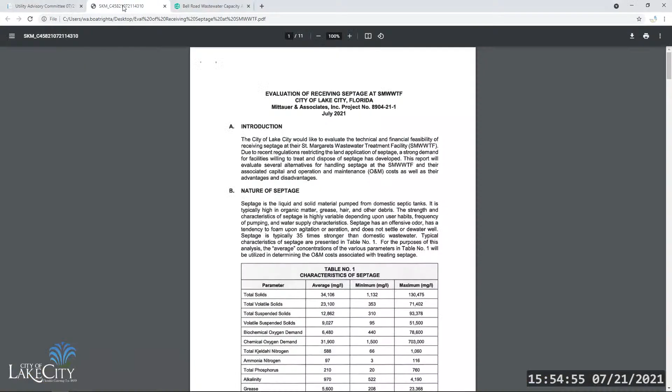One moment, please. So the feedback we received is that we had never presented the findings of the study to the full committee, and the public felt they didn't have enough information. There might have been some misunderstandings.

And so my goal with the presentation I'm about to give is to go through what the water main routing study entailed, the various alternatives to achieve the goal of that study, and then what our recommended route was, so that we can hopefully receive guidance to move forward in one way or another.

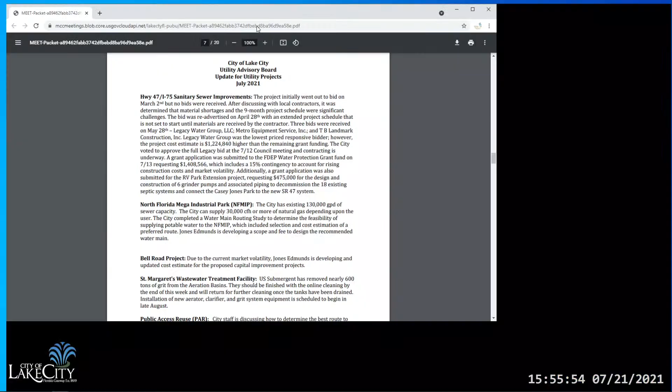Okay, so the water main route study, if you'll go ahead and scroll down to the next slide, the objective of the study, based on discussions with the County Economic Development Group and the folks who are very familiar with the projected development at the North Florida Mega Industrial Park, we decided a conservative estimate of the water demand is 4 million gallons per day.

And so the goal of the project was to evaluate route alternatives for water piping, which we determined would be best served through a 24-inch diameter water main, and to develop a hydraulic model to analyze 2 of these selected alternatives that we find, and then to develop cost estimates for the recommended routes.

The map you're looking at here is the build-out rendering map that is on the website for the North Florida Mega Industrial Park that was developed by Weyerhaeuser and their engineering firm. Go ahead and scroll down to the next slide.

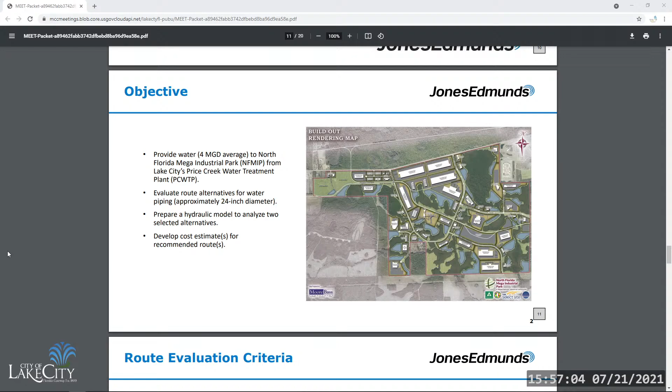We used a significant number of criteria to evaluate and identify route alternatives based on our discussions again with city and county staff, and based on good engineering know-how, and came up with this list here. It's not exhaustive, but these are the highlights.

We of course looked at land boundaries of who owns which property, the wetland locations, as Dr. Barrett mentioned. There are wetlands out in this area, pretty significant wetlands. We also looked at existing infrastructure, how to access not only that infrastructure, but also the industrial park and the surrounding properties.

We looked at the proposed layout, which you can kind of see here superimposed on the map of the industrial park, typical topography, soil type, the length of the pipe, the constraints with constructing that pipe, and our specific stated goal was to initially get water to the north side of the mega industrial park, because that is where it is anticipated that development will occur first.

As we've discussed, the residential developments that are likely coming in with the zoning changes, and any proposed businesses would likely come in off of US 90 first. And so the highest goal was to get water to the north side of the industrial park first.

So I'm going to go through the 6 alternatives that we developed first to kind of show you the different routes we evaluated to get there, and then what our recommendations were.

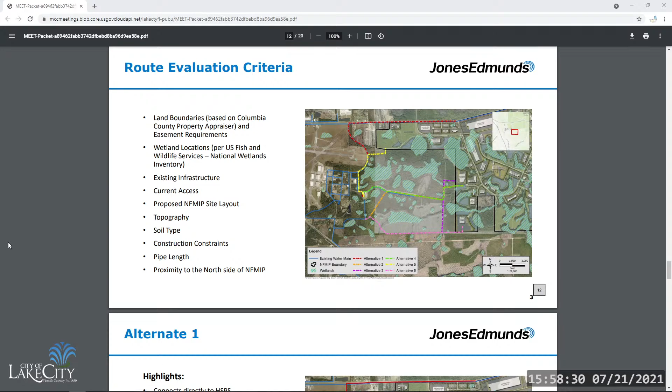So go ahead and scroll down to alternate 1. It's a little bit hard to see here. Thank you, you can kind of see it in red. So alternate 1 comes directly from the high service pump station at the Price Creek Water Treatment Plant, goes up north along Timberwolf to US 90, and then goes all the way over to Tyre Road.

The challenges to this route are the potential conflicts within the site of the treatment plant. There's a lot of piping there already, as well as a pretty congested right-of-way on US 90 and Timberwolf with existing utilities.

Just a little bit of other information, typical soil fine sand out there may require directional drilling. That's kind of in response to one of the items Dr. Barrett mentioned in his public comment, the concern over the wetlands. I'd like to point out that any wetlands encountered during these routes, we would drill under them. There's a specific permitting process through the Water Management District for drilling under wetlands, which minimizes the impact to those environmental pieces. This is a relatively long route, almost 16,000 linear feet, but the benefit is the piping is exclusively within the right-of-way of either the city, the county, or DOT.

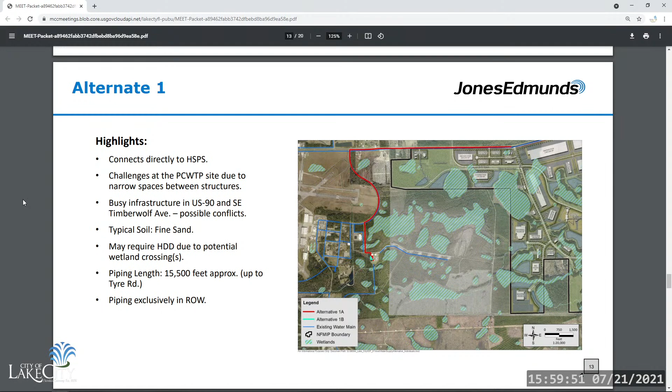Go ahead and scroll down to the second alternative. The color doesn't come across super well on the big screen, I apologize, but it's kind of like a mustardy yellow, a whole grain mustard. This one comes off of an existing 30-inch pipe that's actually south of the Price Creek Water Treatment Plant, and there's already a significant amount of supply coming that way.

It would then go up along a timber road parallel to the well field of the city, and then enter the mega industrial park roughly in the middle through one of their proposed parking lots. This one is not exclusively in right of way - it does include going along dirt roads within water district and Weyerhaeuser property. However, it does minimize the wetlands crossed through construction, so you could do it through open cut trenches, which typically is a slightly less expensive construction method as opposed to drilling under the wet areas. This one's a little bit shorter, just shy of 10,000 linear feet.

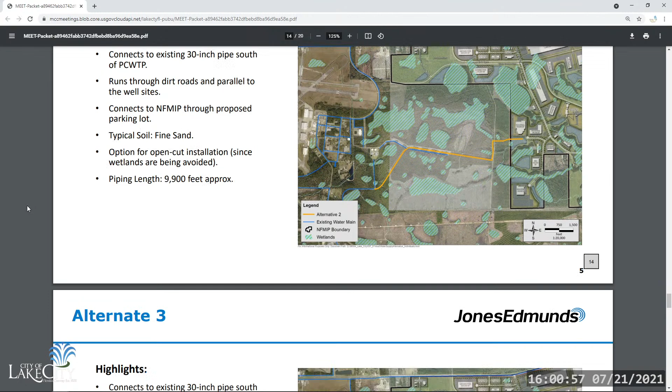Go ahead and scroll down to alternate 3. This one also stays to the south and comes off of that 30-inch pipe. Instead of coming up and paralleling the well field, this follows a timber road at the south end of the Water Management District property. It's not really the south end of their property - they own a lot of property that continues much further south, but this parcel is what I'm referencing. Then again we come up through, it references Road 363. I don't think anyone called it that, but it's one of the timber roads that goes through the district property.

This also would connect to the mega industrial park through that proposed parking area right in the middle. Coming in the middle, the benefit is you have easy access from both the north and the south with just a little bit of an extension of infrastructure, as opposed to coming in on one end or the other. This one has the most variable topography - we see a relief change of about 14 feet as we go along, which adds construction costs. The good thing with a water main is you don't have to keep a certain slope the whole time since it's a pressurized pipe, but it still does either add to your length of pipe by going up and down, or increase your construction cost by having to dig deeper to have a straight pipe.

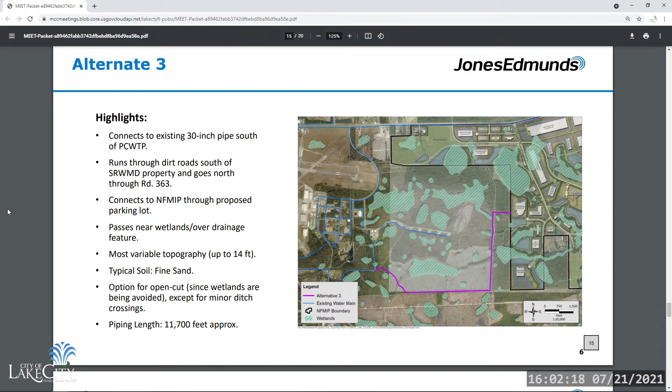Again, this one does have the option to open cut, which helps save a little money because we're avoiding the wetlands. It's kind of a medium length pipe compared to the other alternatives at just shy of 12,000 linear feet. So we're halfway - that's the first 3 alternatives. We have 3 more that we looked at.

Alternate 4, instead of coming off of that 30-inch pipe like the last two we looked at, this one comes right off of the high service pump station at the plant, parallels the well fields, and again splits the difference, coming in the middle of the industrial park. This one's relatively short, a little bit shorter than the last one at 9,800 linear feet, and again avoids wetlands, staying on the already existing timber roads. Not right of way though - we are cutting through Water Management District property.

And again, there's the potential for some conflicts at the plant site because of all the piping that already exists out there. So that's a little bit of a challenge.

This one's relatively straightforward, and we did like this alternative a lot. I do want to say it was one of our top 3. But again, I'd like to restate that one of the primary goals was to get water to the north end of the park first, and by coming in the middle here, you still have to add more piping to get it to the north end.

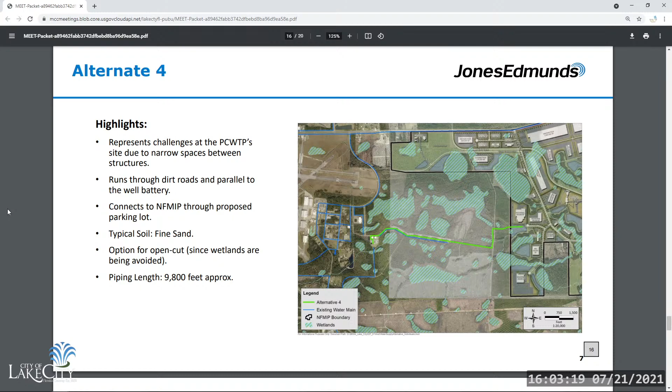Go ahead to alternative 5. This is actually 5A and 5B that you can see in yellow. This one comes right off of the high service pump station, goes north along Timberwolf, and then cuts across one of the timber roads on the Water Management District property to the edge of the mega industrial park.

Again, one of our stated goals for this report was to identify getting water from the plant to the park, not necessarily piping it through the park. That's why we broke this into 5A and 5B. 5A gets us to the edge of the park, the boundary, and it's the shortest route if you do it that way. It's only 5,800 linear feet, so it's relatively short, which leads to inexpensive.

It does cross at least one wetland that we know of, but again, we would propose drilling underneath that wetland. And if we stop at the park boundary, we're mostly in the right of way with just a little bit of coordination with the Water Management District.

Now, we proposed 5B as well because not only did we want to get water to the residential area, which is kind of the northwest corner of that peninsula of property, but we also know there are businesses that are looking to come in off of US 90. So we wanted to be able to provide water to those businesses, and by coming up through the proposed roadway within the industrial park and then connecting with the existing water main on US 90, you create a looped system.

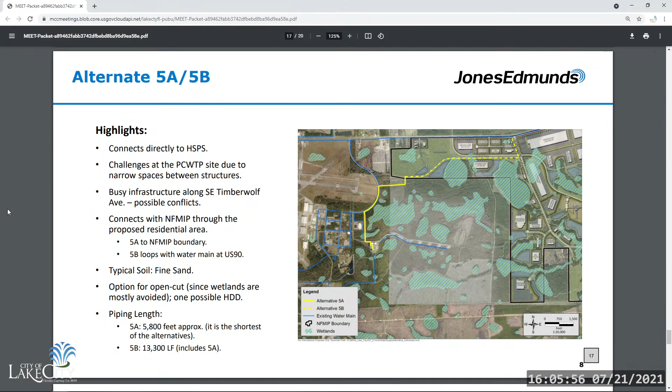And then if you scroll down, our last alternative we looked at was 6. This one is also kind of hard to see—it's pink down there at the bottom. This comes off of the 30-inch pipe.

Thank you for printing that out. It follows Timber Road down the south end of that parcel and then connects to the North Florida Mega Industrial Park at the south end. It's a relatively short pipeline. We're avoiding wetlands for the most part, with a couple of minor ditch crossings. It does have a little bit of variable topography, but it's another relatively straightforward construction job.

The only problem is it comes in at the south end, and our goal was to get water to the north end. We just wanted to show that we did evaluate bringing water into the park in multiple places, because it gives you more flexibility and more options to look at.

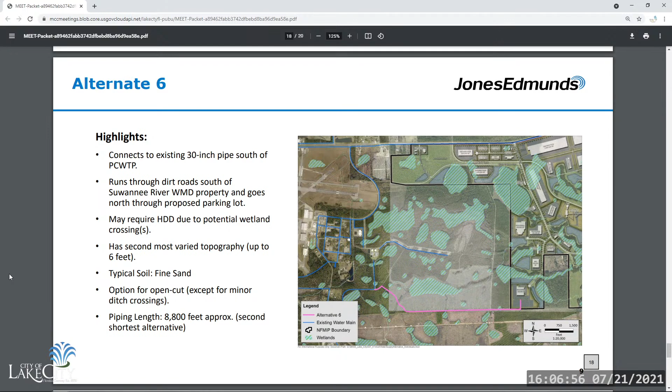So that was all 6 of the alternatives we identified as ways to get water from the plant to the park. If you scroll down to the next slide, we presented those alternatives to city staff. We had a workshop where we went through all of the pros and cons, potential challenges. We created a scoring system matrix to look at all of those items that went into the evaluation, and we recommended 2 of these alternatives. So we modeled these 2 as our selected alternatives.

One alternative again goes up north along Timberwolf, along US 90, to that first west entrance to the North Florida Mega Industrial Park, which allows us to serve the residential area as well as the businesses we believe will come in first. Whereas 5A and 5B is a little bit shorter. It still serves the same area, but we avoid the congested right-of-way along US 90, where there's already about 4 different utilities running, so we likely would not be able to construct in the DOT right-of-way. We would have to get a new easement south of that from Weyerhaeuser.

So in the end, we modeled both alternatives. They both had very similar results with regard to their impact on the city system, so the difference is relatively de minimis. And we ended up recommending alternative

5A/B. We believe 5A should be the first phase of this, getting water to the park while development in the park is still being worked out. Then once the development is a little more locked in, and we know where the road and businesses are going to go, we can coordinate design and construction to do phase 2, which would be 5B.

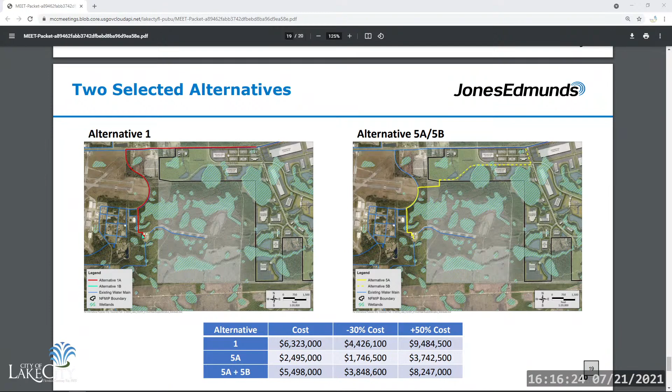So the 12-inch right now — I think is what you said, 12-inch exists behind the library as we speak, correct? And just like it's showing here. The blue piping in that picture is the existing water line. It goes up, it actually borders that library on two sides — the east side and the north side. What size is it? It loops around the end of the airport, it's 12-inch. 12-inch all the way? Got you.

Now with that, Jamie, you mentioned a secondary watershed study. That would be separate from this, correct? But if they're having a flooding issue, that might be something there's grants available for. There's a lot of watershed studies, because maybe there's another way to mitigate that, since it wouldn't be caused by this activity.

There are grants out there with the American Rescue Plan Act funding coming our way, specifically looking for projects that address resiliency and equity. With Columbia County being a rural area of opportunity and a low-income, fiscally constrained community, we would absolutely qualify for equity-based grants. And flooding or flooding protection projects also qualify under resiliency.

As an example, when the notice of funding opportunity is released, which it has not been yet, they'll offer planning grants for a study, and construction grants. So the county and/or the city and/or the college, since it's a public college, could apply for these grants, and then hire an engineering firm, possibly me, to do that study.

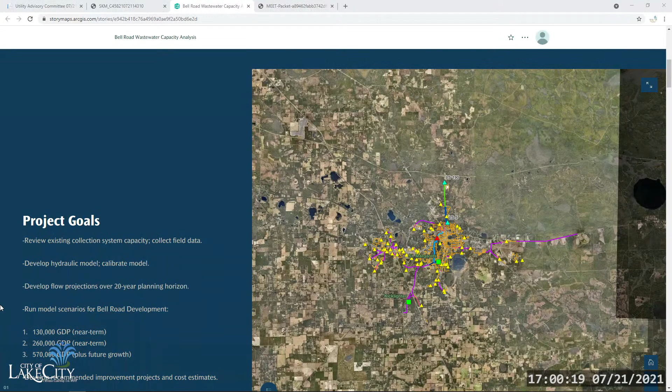If you could scroll down. I guess the font's a little small, I apologize. The goals of the Bell Road wastewater capacity analysis project — you can zoom in on that map to show everyone, just use the scroll wheel. Is it scrolling the whole window? You can use the plus and minus signs in the bottom right corner, and that should zoom the actual map itself.

The colors don't show up great on the projector, but this is an example of the spatial data for the city's wastewater utility system. Bell Road's at the north end, and the St. Margaret's plant is in the middle there. The goal was to review the existing collection system capacity from the Huddle House down to the St. Margaret's wastewater treatment facility, develop and calibrate a hydraulic model, and then develop flow projections over the 20-year planning horizon and put those into the model as scenarios.

As I said before, this project had a discrete goal: to look at a specific business coming in that had known flows that might be going onto Bell Road, and that's what the scenarios reflect. Scenario 1 was their one line of product, 130,000 gallons a day of wastewater, very near term, like in the first year. The second scenario was 2 lines, so 260,000 gallons a day, also in the very near term.

We did a third scenario that looked at future growth in the city, plus the full build out of this mystery business that was going to come in with their product lines. That was 570,000 gallons per day. Based on those scenarios in the model, we developed recommended improvement projects and cost estimates.

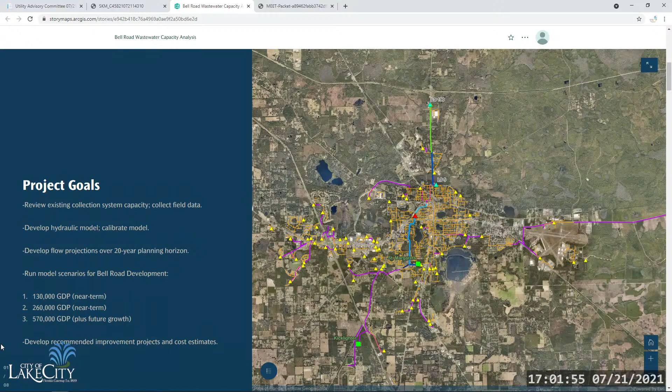You can go ahead and scroll down and we'll go through the 6 projects we identified. The first one was improvements at lift station 5, which was really simple — just upsize the pumps to address the additional flow, helping prevent high water level alarms and prevent the lag pump, basically the backup pump in the lift station, from needing to turn on.

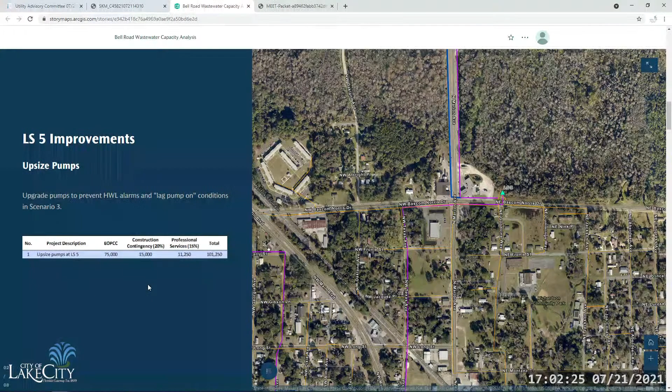I apologize for how small the font is on the left. I think you can scroll in with the scroll wheel this time and make it a little bigger — no? I don't know, apologize. But what you just did work, you can do that little zoom in.

Basically this table represents our engineer's opinion of probable construction cost, with a 20% construction contingency to keep in mind the current market volatility, and 15% for professional services, because this was a planning level effort supposed to look out over 20 years. We're being really conservative with these numbers, and that's what the total cost is. For example, this project costs roughly $101,000.

That's just to upsize the pumps at this lift station to address the future flow.

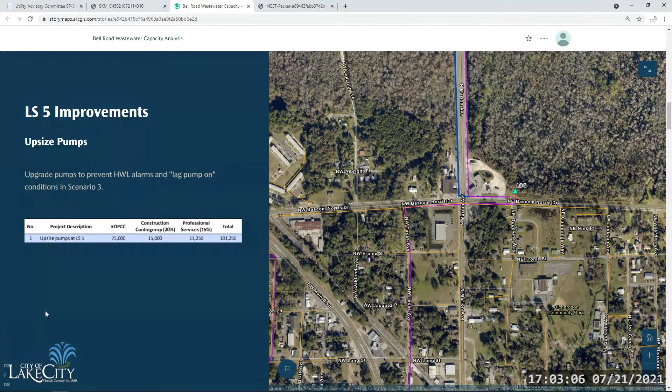You can scroll down to the next project. I can also in the future bring actual visuals of the model showing the pipes that are good versus the pipes that are bad. But this is us dipping our toe in the water here. As I present on the master plan, I'll bring model scenarios for y'all to see. So this next project would be from lift station 190 to lift station 5.

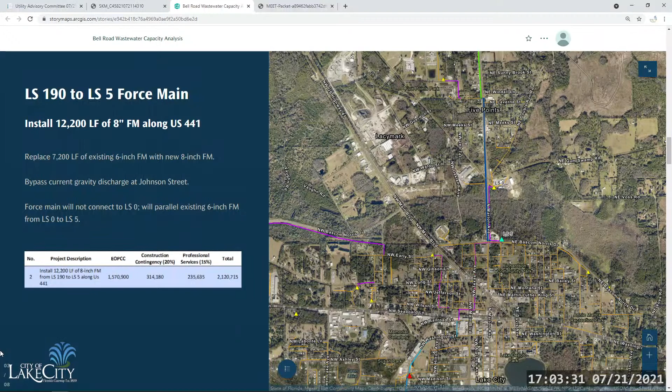It looks like our zoom got a little screwy, but you can click and drag the map down to see the full extent of that pipeline. If you grab the middle and drag down... yeah, there you go. And maybe zoom out one if you hit the minus button on the bottom right. Yeah, there we go.

I know it's a little hard to see, this is a work in progress with the projector, but lift station 190 is at the top, the green triangle. Lift station 5 is down there near the bottom. And the project would be to replace 7,200 linear feet of existing 6-inch force main.

We're upsizing it to 8-inch, that's the green section of pipe. And then we would add an additional section of 5,000 linear feet of 8-inch force main to bypass the current gravity discharge. Basically, this helps alleviate capacity concerns in the existing gravity collection system and just pump it straight down to the next lift station.

So we'd be going away from lift station 0, which you can kind of see in the yellow triangle. In this project, the engineer's opinion of probable construction costs plus contingency and professional services is $2.1 million. And again, that kind of fixes all of the pipeline constraints from Huddle House, which is lift station 190, down to the north end of downtown.

You can go ahead and scroll. How much, Jamie? That is $2.1 million. So the basic construction cost is 1.5 plus contingency and professional services. How much would that increase your sewage flow? So these recommendations are all to meet the needs of scenario 3, which is 570,000 gallons per day. And we're just addressing constraints from Huddle House down to St. Margaret's.

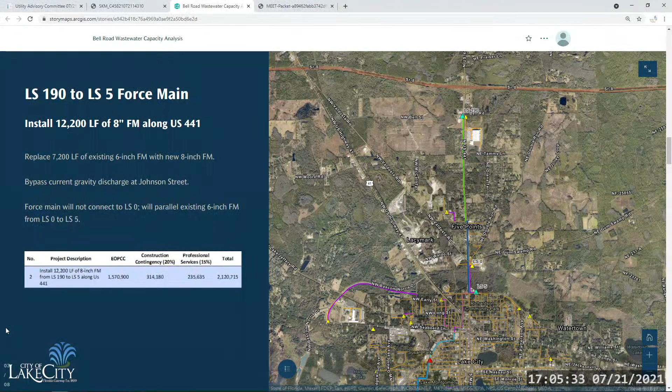But yeah, that's what these projects are. So this focuses on the north end of town, kind of going away from the gravity system that's getting full and just going from one lift station to the next. We call that repumping. Okay, so that's project 2. You can scroll down to the next one.

So this third project is the Northwest Washington Street Force Main. It basically is the section of force main from the railroad, Northwest Railroad Street, down to kind of Young's Park right there. We would put in a new 10-inch force main. Again, this is to alleviate concerns in the existing gravity collection system, which is the piping is too small to handle that flow. So we're just going to blow past it and go from one lift station to the next.

This would also be paralleling an existing clay pipe. So basically there's an old clay pipe that can't handle much more flow without breaking, but it's not useless. So instead we're just going to put a new line next to it, so the clay pipe doesn't take on any more flow and we just pump past it. That's what we're collecting. So that project is just under 3,000 linear feet of 10-inch force main, and that cost is $739,000.

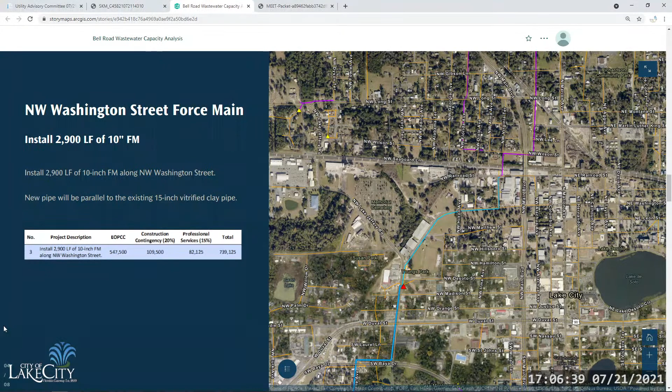So you can go ahead and scroll to the next one. So this next project is actually kind of a two-parter. We are recommending the construction of a new lift station at Young's Park, and we kind of roughly placed it at the corner of DeSoto and Lake Jeffrey. That was just conceptual, that can change. The goal is we're intercepting flow from the upstream lift station and gravity system, and then we're going to send it through a new force main straight to the plant, basically, because this section of town is older.

The pipes are typically made of clay, and so they break easily under too much pressure, if they're too full. And there are environmental concerns in this area because there are those lakes that are right there. So the idea is you put in a new lift station to intercept that flow, so instead of going all through the gravity system along the lake, you just pump it straight to the plant.

We would design it so that you can periodically flow through the gravity system to keep it flushed out and keep your solids suspended, which is important. We don't want to completely eliminate the flow. That's because this gravity pipeline goes behind houses on the lake, and it'd be really challenging to take that pipeline out and put a new one in. The topography and elevations work against us, and it would be very expensive to do that construction right next to the lake. That pipeline is like a single point of failure right now for that area, so we're creating a secondary route, but not taking it fully offline.

Just the lift station itself would be roughly $486,000. I want to say these cost estimates are all from a very recent bid we had on a Jacksonville Beach project that included all the force main components and lift station components you're seeing today. So these are really up-to-date costs based on the market we're seeing now. But you'll notice if you compare this to the report, they're about 40% higher than what we found last year. That's how crazy the market is.

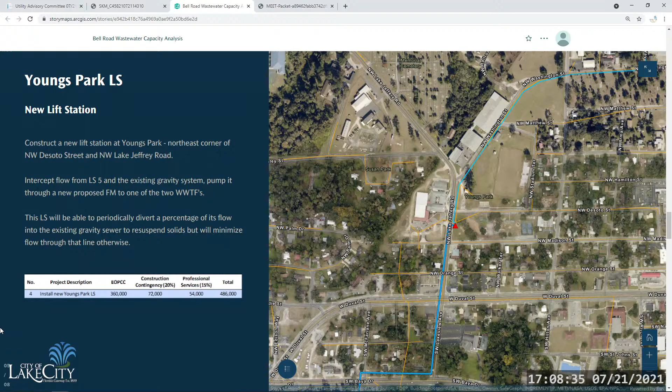So if you scroll down to the next one, this Young's Park lift station would go into this new pipeline. I'm going to walk up to the map. It's kind of hard to see, but the pipeline I keep talking about, the single point of failure, is this gravity main that comes along Lake Montgomery Ave right here, and it's behind all of these houses. So to go in and replace that pipe or do the work here would be very challenging construction-wise.

But from an environmental concern, we don't want to put any more flow in this pipe because it would break and go in the lake, and nobody wants that. So this is kind of the concerning area all along this strip along Lake Montgomery.

The plan is to put a new force main from the new Young's Park lift station down the road, straight down McFarland to the St. Margaret's plant. It's a long pipeline, almost 2 miles, just shy of 10,000 linear feet. This is the most expensive standalone project, but realistically it would be combined with the previous one we just talked about. This pipeline alone is $2.29 million, roughly.

And this, again, allows us to bypass all that older gravity system, kind of east of this proposed pipeline, and take the pressure off that part of the system and reduce environmental concerns.

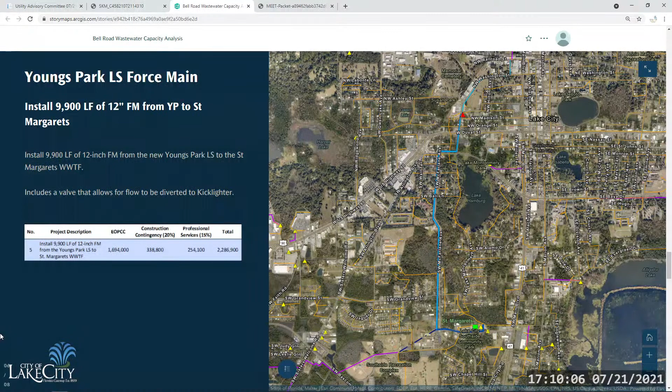If you scroll down, our last project is what we're calling an optimization project. This is one of the goals of city staff, to kind of optimize the flow between the two plants. St. Margaret's is nearing capacity. What capacity can St. Margaret's hold? It's not nearing the DEP concern limit, which is 80%, but it's a 2.95 million gallon a day capacity, and it's getting a little over 2 million.

So we're getting close. While we can send this flow to St. Margaret's and it can handle it, we don't want to hamstring ourselves from development throughout the rest of town. So this is the recommended optimization project. I know it just looks like a straight line through that property, so we can go around the ballpark, but this is just giving you the idea.

We would install a short stretch of force main and valve it so we can redirect that flow to Kicklighter, but still have the option to send it to St. Margaret's as needed based on whatever percentage of that flow it can handle. This gives staff more control over how the flow moves through the system, and the opportunity to send not all of the north side of town to Kicklighter, but whatever percentage they want, because this would be a big line taking a lot of the north side of town.

So that would be 1,600 linear feet. The real project realistically would be a little bit longer because we probably want to follow the roads. But again, it's just the idea that you could shoot it over this way to the line that goes to Kicklighter. It's a relatively inexpensive project, all things considered, just under $600,000. But with all of this together, you get to move a lot of wastewater around and give a lot more control, and it allows you to open up capacity at St.

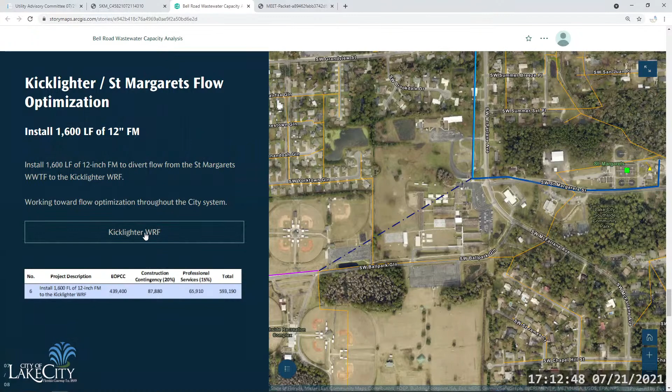And you can actually, where it says Kicklighter Water Reclamation Facility, you can click that. It's a button, and it's supposed to zoom out to show you where Kicklighter is, if it works right. It does. All right, I'm excited about this map. I got to work on it with the colors, but so you can kind of see just that little connector piece will connect us to the existing lines that go down to Kicklighter.

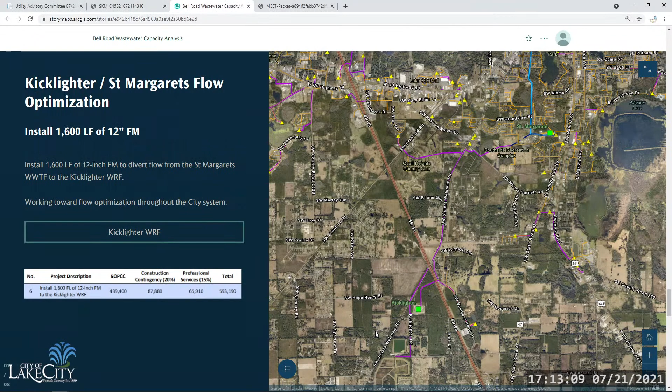So what is the total cost of all the pieces? Of all the pieces together, it's 6.3 million. And if you scroll down one more, it actually has the summary table with all the costs. And if you have any questions, we can click on these buttons to zoom to each of the individual projects. But yeah, the grand total of all 6 is

$6,327,180. And that is an updated cost estimate based on recent bids from the last 60 days. So that's as close to an updated number as we're going to get in today's market. And that's, again, to do all 6.

Now, this plan, it adds the capacity, and with what those companies want, is there more capacity to take some of those septics up there on the north side offline and put them into our system? Yes, and so what we looked at when we did this model is along this pipeline, we looked at the commercial and residential areas that feed into it currently, and we used the medium rate county growth rate to assume residential and commercial growth in the area, and it exceeded the number of vacancies for basically empty parcels.

And so we assumed full infill development along with the flows from this proposed company, and these projects address all of that flow. So it's a big company coming in, 500 and some odd thousand gallons a day from Bell Road, plus full infill development along the route of this corridor that covers all of it.

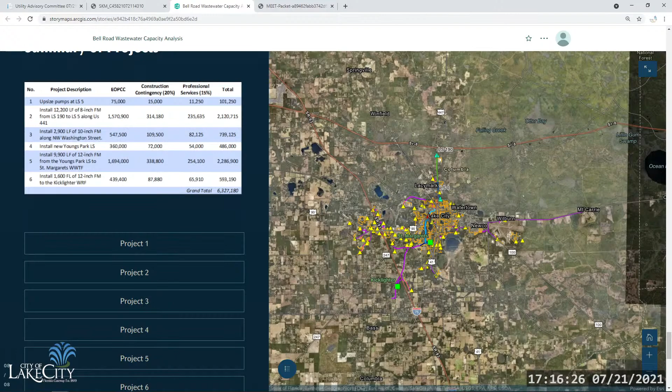In the report we did talk about what happens in this scenario, so you can parse out a prioritization from there. But this project did not include prioritization, it was just what do we need to do to meet the need. For the master plan, we will include a prioritization analysis and a recommended schedule for implementing the projects to address demand as it grows in 5, 10, and 20 years. This project just didn't have that level of detail.

So Jamie, in your opinion, relevant to Todd's Lake and the issues we've got down there, wouldn't this put us a little farther up the line as far as accessibility to possible DEP grants, EPA grants, right on down?

Yes, and all the phases are important, but if we could only get funding to do one, I would love to do the one going around the lake, because like Jamie said, that is our single point of failure. If that line goes out, you've got trouble - not only is it going to be a challenge to repair, it's going to be an environmental nightmare, and we could exceed that $6 million real quick. You'd have to bring emergency services in for something like that.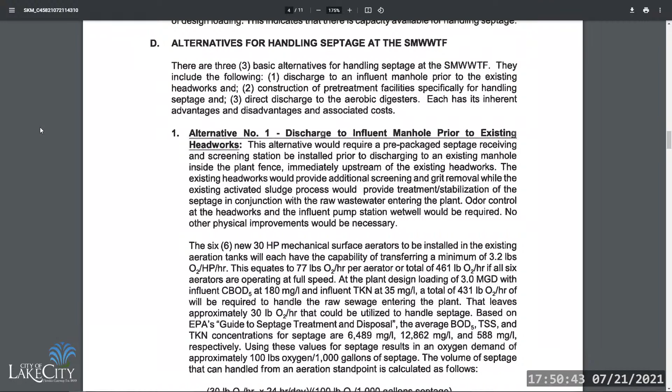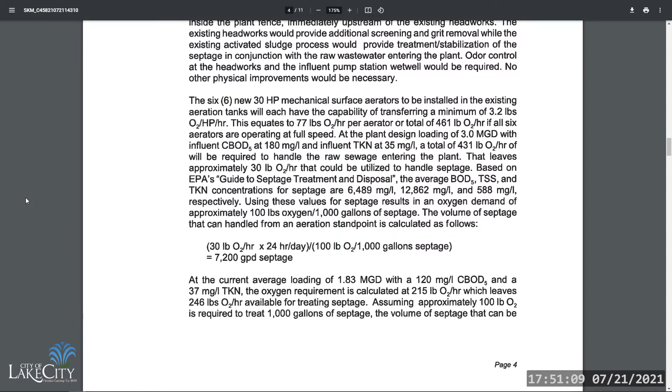And based on that, they did some calculations. At plant capacity, the plant's permitted for 3 million gallons a day, and at the current loadings on our influent, there'd be enough oxygen available in our aeration to receive 7,200 gallons per day of septic.

The 21,500 gallons per day of septic would be maxed out on our current average flow rates at the plant. If we brought the plant up to capacity on the loadings, then we could receive 7,200 gallons per day.

They recommend that if we choose this option, to start out with 8,000 gallons per day, and if we don't see any problems over a month or couple months, then increase it by 4,000 gallons per day in increments until we do start seeing issues or adverse effects, and then we'll back off to where it's an acceptable level.

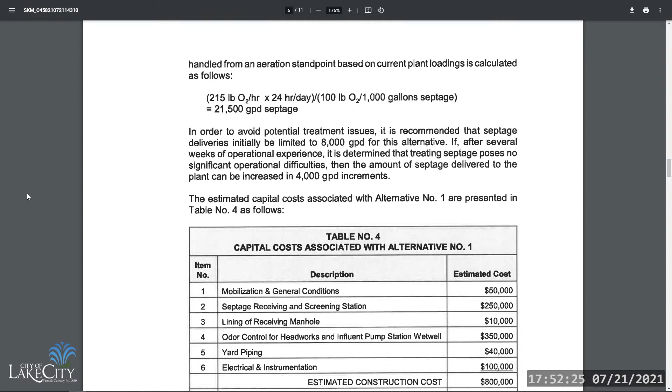But keep in mind that if we get up around that 20,000 gallon a day mark, then we're putting the plant at capacity, even though we still have flow capacity. The loading on the plant is going to be putting a strain on it.

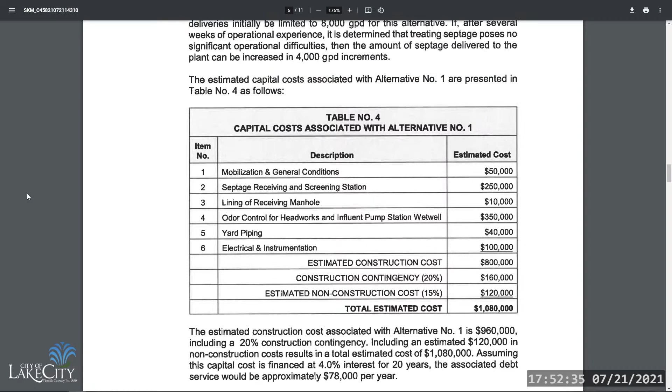Table number 4 shows the total cost of what it would take to get the plant, everything that we would need to be able to accept the septic upstream manhole. Total for that would be $1,080,000. That's an estimate; it could vary a little bit.

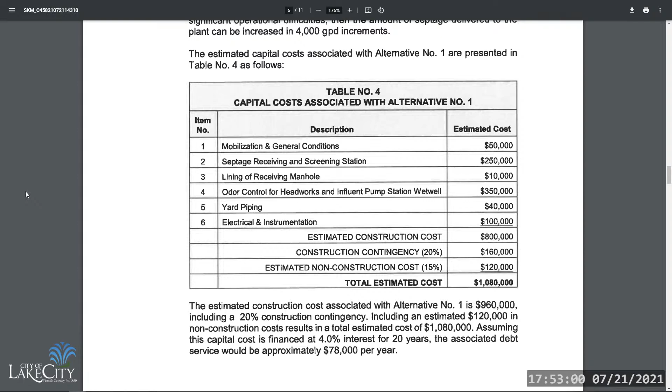The next one shows the operating and maintenance costs on that, table 5. They're $234,000 annually to operate and maintain the system. That includes the labor, the power usage that it's going to take, the additional chemicals that we're going to have to use, and the biosolids disposal. All that's going to increase with the added solids loading that the septic is going to put on the plant.

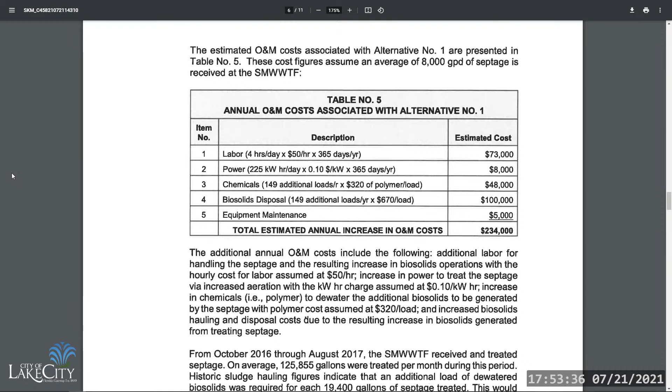Table number 6 shows the advantages and disadvantages. It can generate a revenue stream for the city, and provides a much needed service for the septic tank pump out industry. The disadvantages are that it's going to significantly increase the plant O&M costs, power usage, labor, all that. There's potential for odor generation, though we did factor in for odor control. We'll need to confirm there is a viable market from the septic haulers and that they will want to pay the rate that we're going to have to charge to break even.

It consumes the capacity of the plant, has potential for excess foaming and aeration, MLSS fluctuations, suspended solids in the plant, and does not allow for controlled introduction of septic. By that, I mean like we were accepting it before, they were dumping right into the headworks. A tanker would come in there, dump a load of septic right into the plant, and it went right into the aeration - that's what caused all those major fluctuations and issues.

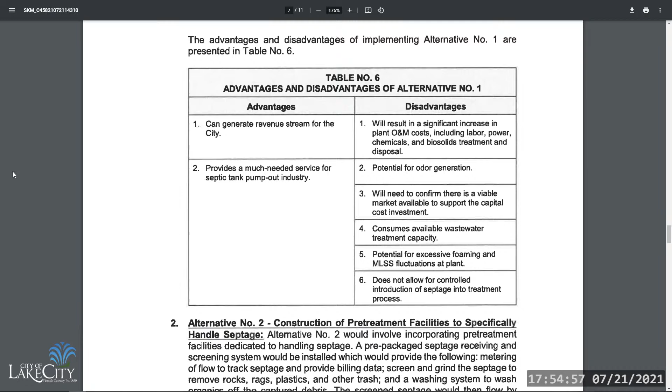Alternative number 2, which is the one I like the best, and as we'll see later the engineers recommend it as well, is construction of pre-treatment facilities to specifically handle the septic. Like I mentioned before, we have an existing tank there that we could modify. We could add in a septic receiving facility, which would further screen it and move any big debris out of there, blowers to aerate it, and then a pumping system to add it to the plant at a controlled rate.

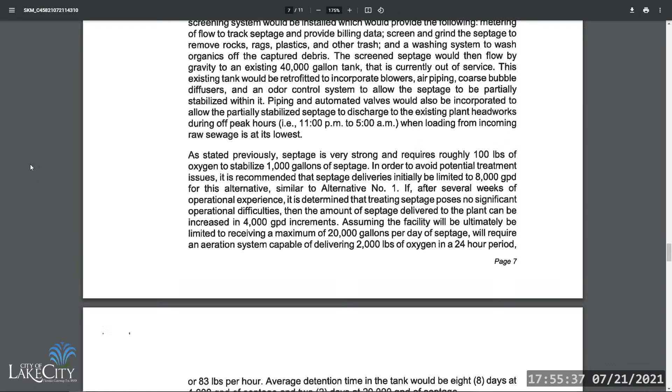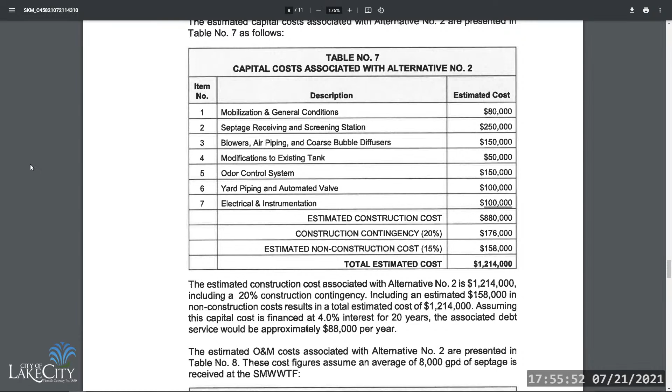Table number 7 shows the total cost for that one would be $1,214,000. So not that big of a difference for what I feel is a major advantage on treatment and saving capacity on the plant because of further aeration.

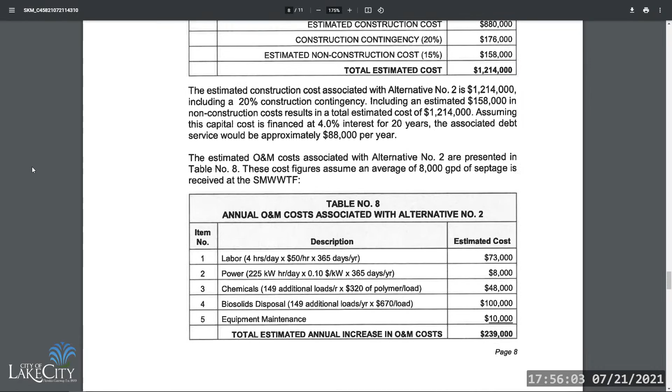Table number 8 discusses the O&M cost of that unit, which is roughly the same as the other option.

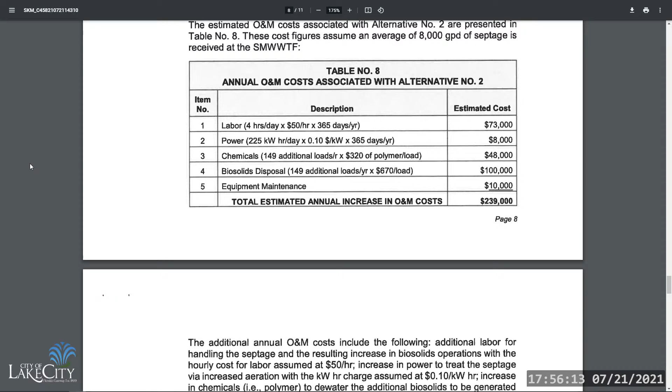So, on the first option, I kind of skipped ahead there a little bit. I think the break-even point for the city would be 11 cents per gallon. That's breaking even. On option number 2...

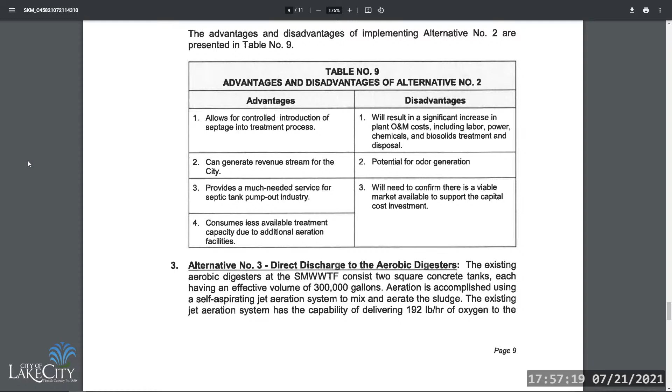Break even for the city, I believe it was 11 cents per gallon. And then they put in their alternative number 3 down there at the bottom: discharge to the aerobic digesters. I won't even go over that. Based on the treatment of the aeration in the digesters, they say...

Based on the required frequency of dewatering, only partial stabilization of the septic may occur. Prior to dewatering operations, the generation of odors would also be a major issue, and odor control facilities at the digesters would be required. For these reasons, and the fact that the existing aerobic digesters are somewhat undersized for a plant with a capacity of 3 million gallons a day, we do not recommend the introduction of septic directly into the digester. So alternative number 3 is pretty much off the table.

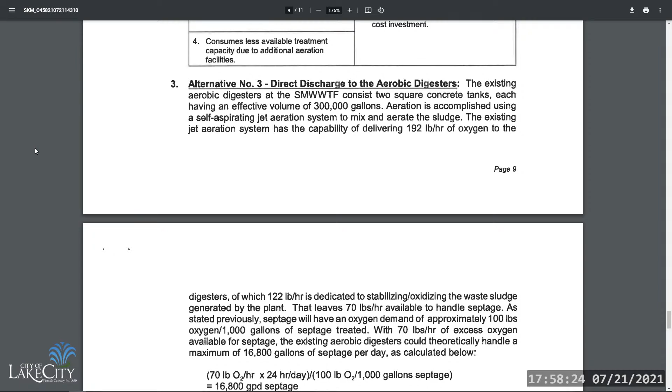Their recommendations are that—scroll down, Adam, to page 10—they realize there's a high demand for septic treatment facilities, and I think, like you said Mr. Sampson, it's only going to get worse over time. Typical charges for treating that at other facilities is 10 to 12 cents per gallon. They recommend that we start out with an initial charge of 13 cents per gallon.

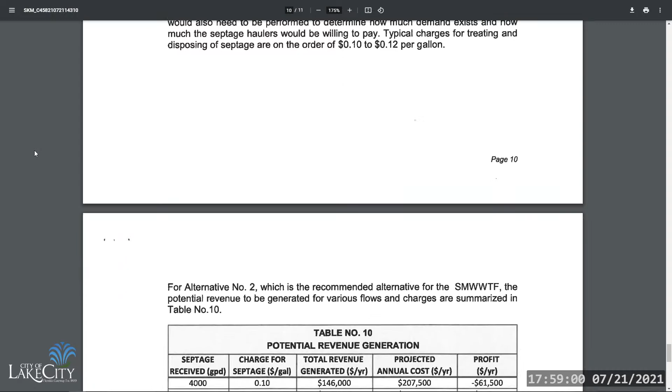That allows for roughly $50,000 annual profit for the city. Keep in mind that is at an 8,000 gallons per day average. So if we don't get 8,000 gallons a day, that profit margin is going to shrink a little bit. And also, as the flows increase at the wastewater facility, then the amount of septic that we can receive is going to go down—actually, our capacity is going up.

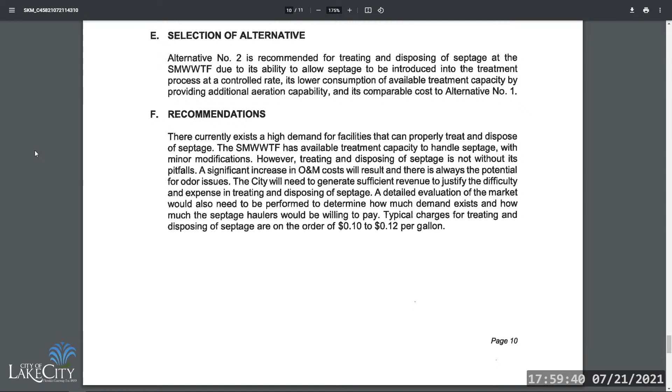The flow is floating on the actual influent flows. So there's some cost breakdowns, like I said, I'll give these to y'all, you can go over in further detail if you want. Pretty much it, that's all I've got, if you have any questions.

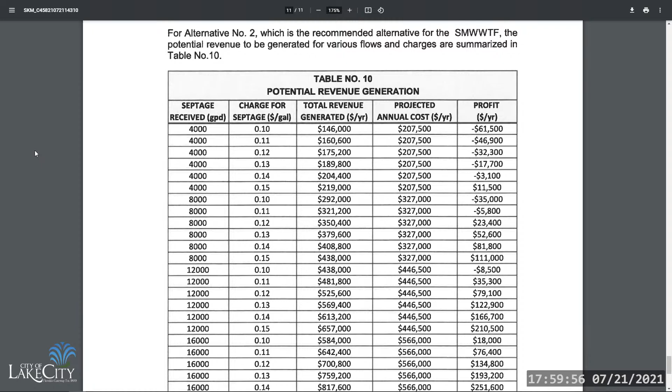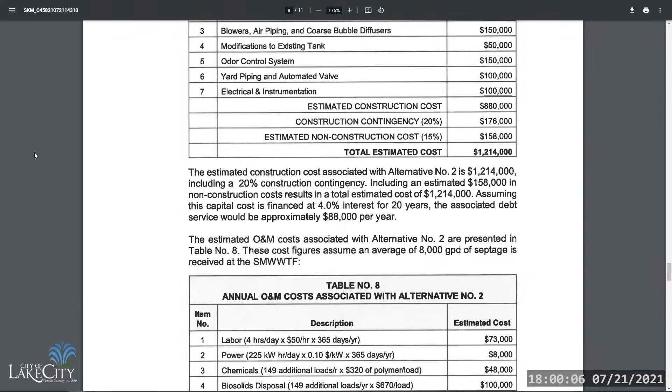I have a couple quick questions. So the 8,000 gallons a day—I couldn't quite make out, with option 2, how many gallons a day can we actually treat on the high side? Did it say 30,000? Yeah, I believe it was the same as option number 1—20,000 gallons per day is maxing out the plant. Okay, so I didn't know if that would have changed with the tank and the way it's entered.

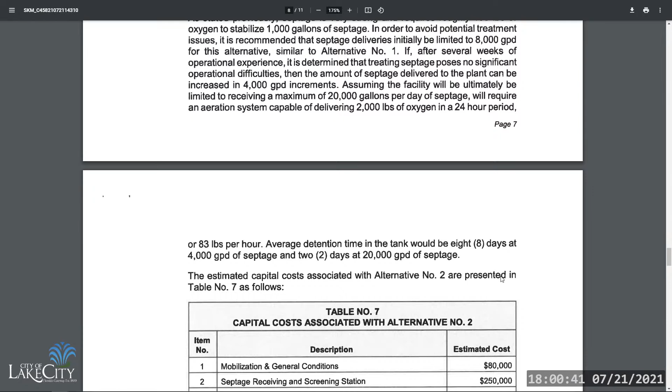No, that's why they're recommending starting out at 8,000 gallons a day, and then we can increase that until we start seeing adverse effects on the plant, and we'll probably back it down some. Or, like I said, if flows increase at the plant, we may back it off.

And so another variable we control will be the pricing per gallon. So it could be that initially we're not the cheapest, I wouldn't think. And I don't think we'd want to be the cheapest provider, but there's a lot of factors as to where you're going to dump to—what's the gas cost to take it wherever you're going, or the diesel, compared to this.

So I think the other issue is we'll tap out at 8,000 a day. I don't know what the actual demand is. I think that is the next step—what's the demand? And knowing what the demand is can help make that decision.

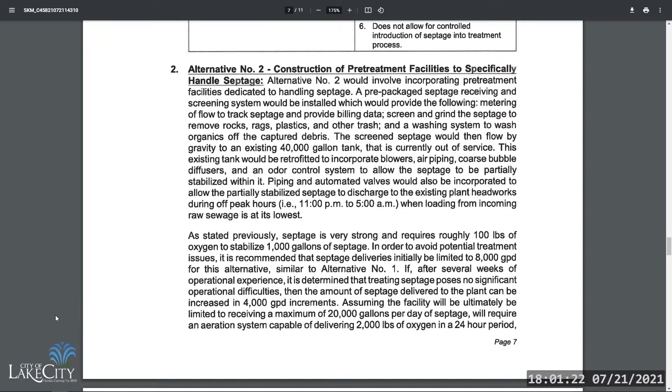I think something like this would definitely qualify for some of that grant funding. I'm not sure how that would work exactly. Yeah, I had a couple emails back and forth with Jamie, and she seems to think that we could probably maybe tie it into some Springs grants for nutrient removal, and there's a couple other options in there that we can look into.

Cody, is this at the St. Margaret's or the Kicklighter? St. Margaret. Gotcha. And I think option 2 is the only one really to look at there. I mean, I don't like the manhole idea—I think that would create some issues—and definitely don't like number 3. But I think option 2 makes the most sense, because if we decide to move forward, you've got the tank, it can go into the tank, and then you can control the flow and how it works, so you don't want to kill off the bacteria.

And at the same time, starting at 8,000, so the break-even point for 8,000 gallons a day was 12 cents—or 11 cents. 11. And then break even, that's at 8,000 gallons a day.

So if you got it up to like 15. Table number 10, does it have different options for... oh yeah, it does. Okay, I definitely want to look at that. I think that would be good to look at, because also the cost is variable as well. Yep, and it takes that into account too, it looks like.

So there's a point, like when you hit a certain usage, you actually drop in profitability as well. So that's something you can control by what we take in a day. But as far as what the actual price point is, I think that's the survey we need to make too, and say, hey, what's available? Who knows, maybe 15 cents is good, I don't know. I think they can do it for 8 now, but that's about to be changing too. So as price changes, everything goes up. It might be, we don't need to be the cheapest provider if we decide to do it. We just need to be an option available that's going to be revenue for the city at a positive income.